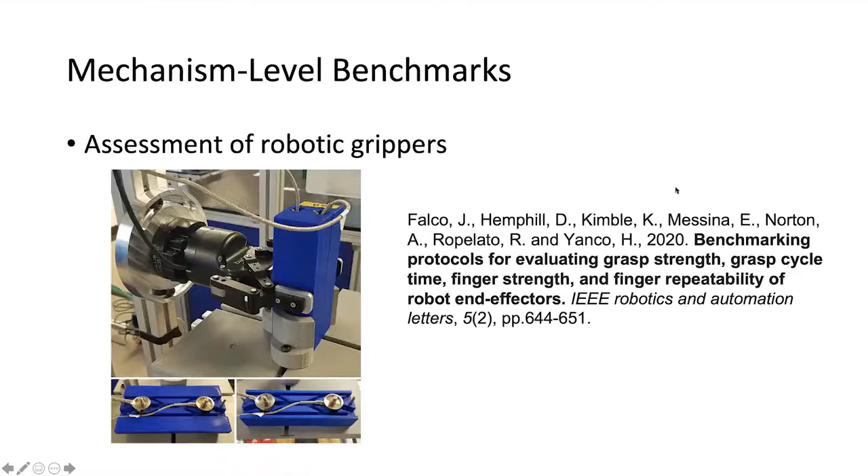Another one is algorithm level. This is mostly about measuring the performance of an algorithm. One example is measuring the performance of a grasp planning algorithm.

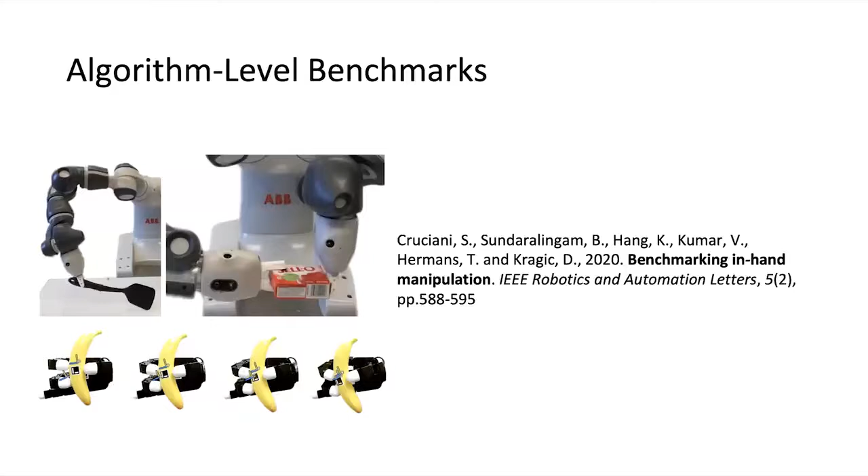In this particular example, the authors define some objects and some poses within those objects, and define experimental procedures targeted to assess the performance of the grasping algorithms. Another example here is benchmarking in-hand manipulation performance, again with very well-defined assessment strategies and experimental procedures. When we see the third category, this is the system level benchmark.

This is basically making the systems execute a certain task, usually as an end-to-end performance evaluation. For example, the Amazon Picking Challenge inspired benchmark defines poses of objects within a shelf along with some experimental procedure details.

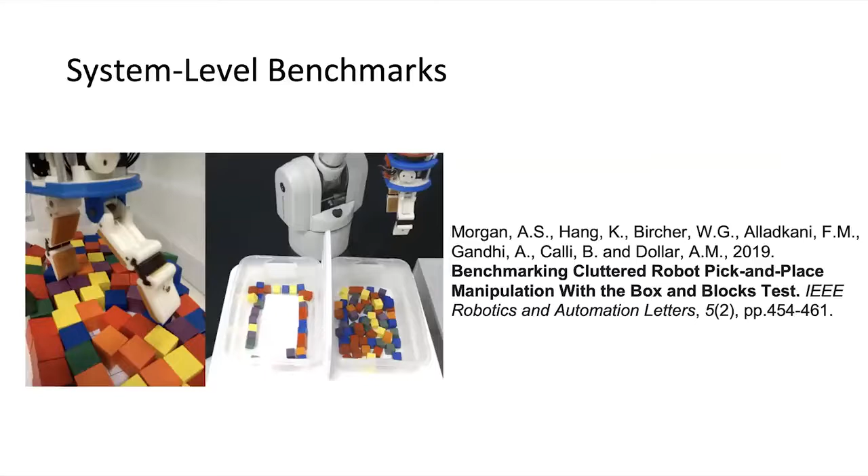Another one is the box and blocks test, published in this SI. The Amazon Picking Challenge 1 was not published in the SI, but this one was, in which users are expected to transfer wooden blocks from one container to another.

There are various target domains here that can be robotic grasping, bimanual manipulation, even aerial manipulation. There are a variety of applications.

There are some platform related issues when we use benchmarks in our own environment, in our own labs, because people use different strategies and different hardware when assessing a particular algorithm. I want to discuss those more in another presentation in this workshop, but one good solution is cloud-based benchmarks, which has been presented in this workshop on several occasions.

When we look at this whole picture, in competitions we usually have assessments with a judge. Each of these—competitions, benchmarking protocols, and cloud-based benchmarking—have different properties and different outcomes. Competitions are assessed with a judge, benchmarking protocols are usually self-assessed, and cloud-based ones can be judged or automated, oftentimes automated assessment.

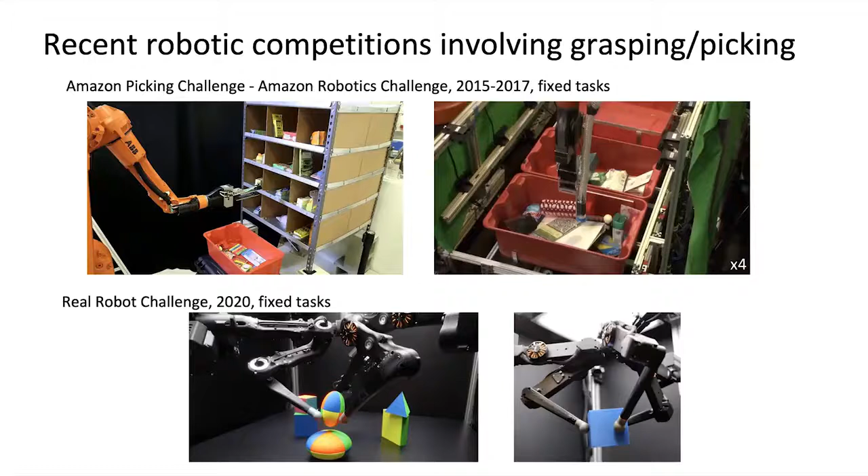Some of the competitions require manipulation, not purely a grasping action or just pick and place tasks, but also changing the object pose during motion or placing it in a special configuration. You see here two of them: one is the Open Cloud Robot Organization Challenge, which we'll have explained later today, focused on reorganization environments on a tabletop scenario.

One other type of competition was the Cybathlon arm prosthesis race, which is not exactly robotics, but many of the methods in robot hands are shared with the design of prosthesis. There are some fixed tasks as well, like picking keys from one place and putting them on a hook, or on the right side, a person hammering a nail.

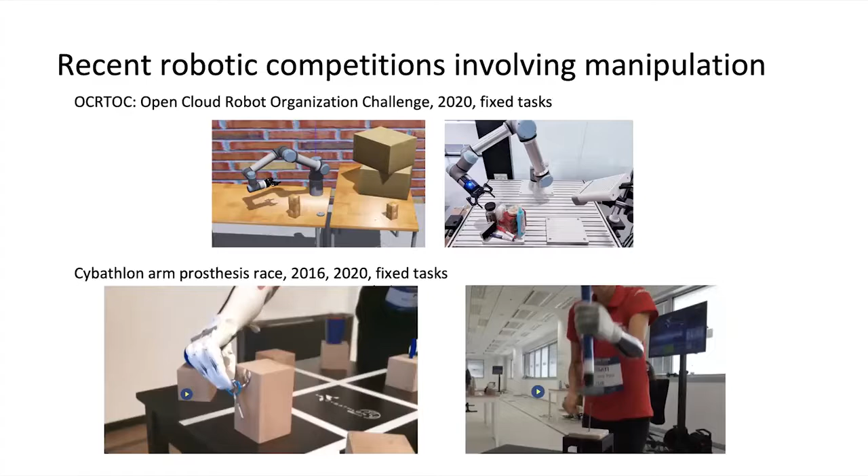Of course, this is an amputee, so they come up with some creative ways to solve the tasks, as you can see in the picture. So this is not an error. Actually, this is exactly how the person was hammering the nail.

Some other competitions involve assembly, which is an additional stage of complexity, because you not only have to detect the part and pick and place it in a certain configuration, but also consider the order to do those tasks. We saw on the World Robot Challenge, for instance, an assembly of this pulley mechanism. In the Robotic Grasping and Manipulation Challenge, we've had an industrial track from the beginning, and NIST has supported the competition by providing for all events one assembly board focused on a different set of tasks. In this case, you see on the bottom right a board with an assembly of a small pulley mechanism and some cable routing and connectors on the board.

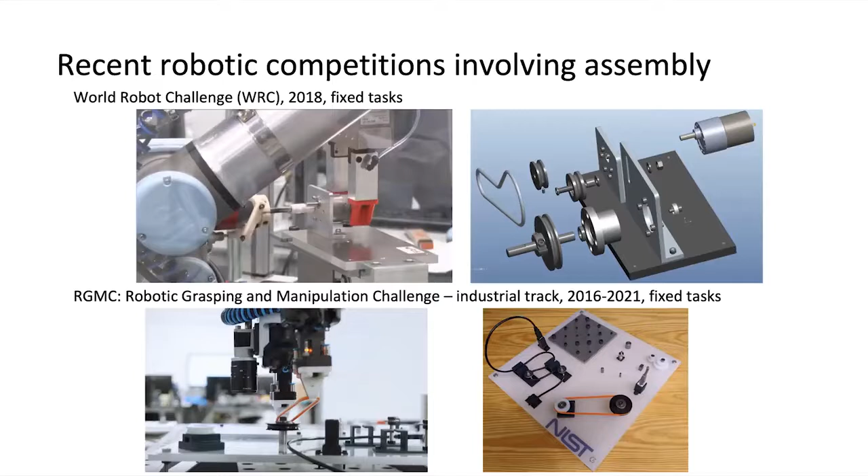Finally, we see some competitions involving mobile manipulation, which is very related to our problems. The most visible one is the ERL, the European Robot League. They have a subset of competitions called the Smart City Robotic Challenge, where they have a mobile platform doing some shelving tasks, in this case on the TIAGo platform. The same robot was used in the IROS mobile manipulation hackathon, which took place in 2018 and will take place again in 2021.

This competition is one of these events that has free tasks, so all the teams can decide what task they want to do using the same basic hardware platform. The advantage is that it simplifies the competition a lot, in the sense that there is a company supporting the hardware and providing on-site technical support. Teams can completely forget about transporting equipment, with all the costs and logistics that implies. However, the comparability of multiple solutions is really hard. It's more for displaying the state of the art in a particular field.

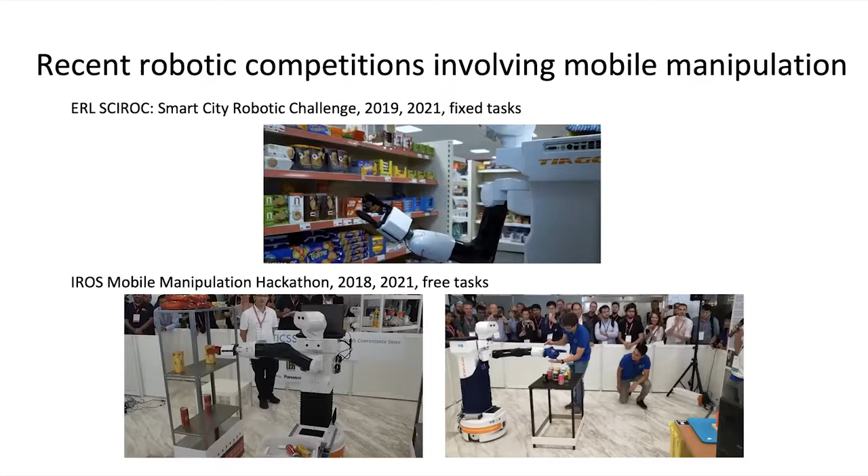So with this overview, we can move on, and Joe will introduce us to some additional examples on the assembly tasks and task boards.

Sure. Hello, everyone. I'm Joe Falco from National Institute of Standards and Technology, also known as NIST. We've developed a series of assembly task boards to support the manufacturing research community in robotics. We see that assembly is a critical operation for most manufacturers, yet it is underserved by automation such as robotics.

In the research community, we see there's been a lot of focus in past years on service robots, and so we're trying to get people interested in manufacturing problems, which still exist and are pretty complicated, especially with the onset of small and medium-sized manufacturing environments. Just to let you know, over 90% of manufacturers in the US are small and medium-sized manufacturers. They have their own issues when trying to implement robotics, but there's the opportunity for lots of solutions in those environments.

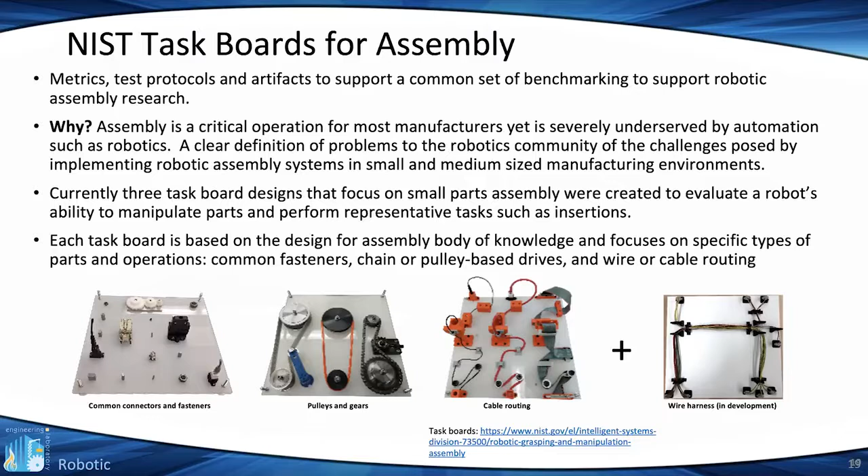So we currently have 3 task board designs that focus on small parts assembly. These include a common connectors and fasteners board, which is our first one. I think you saw it earlier in Adam Norton's presentation. We also have a pulleys and gears task board, a cable routing task board with deformable objects on both of those, and currently we're introducing a wire harnessing task board. More information on these task boards can be found in the link at the bottom of this slide. Next slide, please.

So the competition design - what we did was introduce these task boards to this Robotic Grasping and Manipulation competition that you started, which evolved into a manufacturing track along with the service track. These competition task boards draw from the primary NIST task boards I talked about on the first slide, so we pull in objects from each of those competition boards to construct a single competition board.

What we do is we award partial points per operation based on how well each task is completed. Sometimes someone might not thread a bolt fully, things of that sort. We limit competition time and we apply a bonus to any remaining time.

This is used to encourage autonomous operation. We don't want to see a lot of teach programming, which we do sometimes, but as this competition has evolved, we see that solutions are evolving and paying more attention to what's more important to small and medium-sized manufacturers. So it's a learning curve. We're teaching the robotics research community what the problems are for small and medium-sized manufacturers.

We also encourage the use of perception, both machine vision and force sensing, and we encourage the use of CAD data, which is something that's not typically available in the service robotics community, but is usually always available in a manufacturing environment.

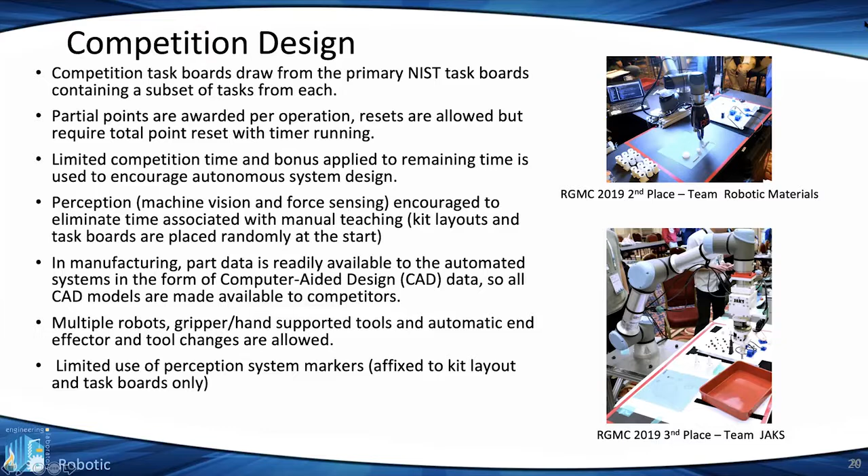So this gives you an idea of where we are with the task boards. We started in 2016 when we met up with you, and we helped introduce a couple of manufacturing type tasks into the service robotics track. The following year, we introduced our primary NIST task board 1 into the challenge, along with the World Robot Summit folks who were preparing for the 2018 challenge, and they came in with a subassembly for gears.

So there were two tasks within the manufacturing track of the competition. The following year in 2018, WRS held their competition. We did not hold the IROS competition. They would have been around the same time. Then in 2019, we introduced another task board to the competition, which was a conglomeration of all the different tasks that were on the NIST primary task boards.

We used pretty much the same task board in 2020, which was remote. The remote challenge had some good aspects to it, in that the competitors got to work in their own environments with the same lighting. Some of the systems are quite complex, so that made it a bit easier. And in 2021, we plan to hold another competition at IROS. The venue will also be remote.

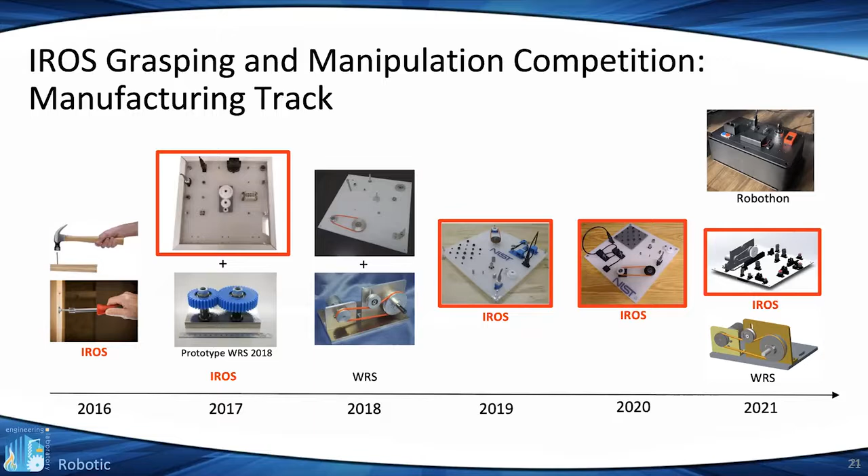Additionally, some other competitions being held are Robothon and World Robot Summit 2020, in 2021 because of COVID. I think it's being held, I'm not sure yet. I should also mention that WRS World Robot Summit also used the same task board concept. So they have a main assembly, but they also break it into a task board, similar to the way NIST does its task boards. Next slide, please.

So what are the solution outcomes to date? Teams vary from year to year, which is unfortunate because there's a lot of lessons to be learned, but some teams do come back and compete in consecutive years. The venue-based competition in the past has presented some performance issues. You're plugging your system into venue power and dealing with venue lighting, and that has been an issue in the past.

So teams competing in consecutive years, I see no indication of better performance. This is probably due to the fact that tasks change from year to year. Teams typically try to upgrade their systems. What I really have liked seeing over the past years is that teams are starting to implement CAD models into their solutions. And those sometimes present problems too. It's a new environment to them.

And a one-shot test may not be the best performance indicator. Ideally, these task boards would be brought back to your laboratory to do benchmarking with multiple runs. That's our intention - we use the competition to essentially promote the use of these task boards for benchmarking back at your home space. And then to the right, you'll see a couple of images from some of the better performing teams.

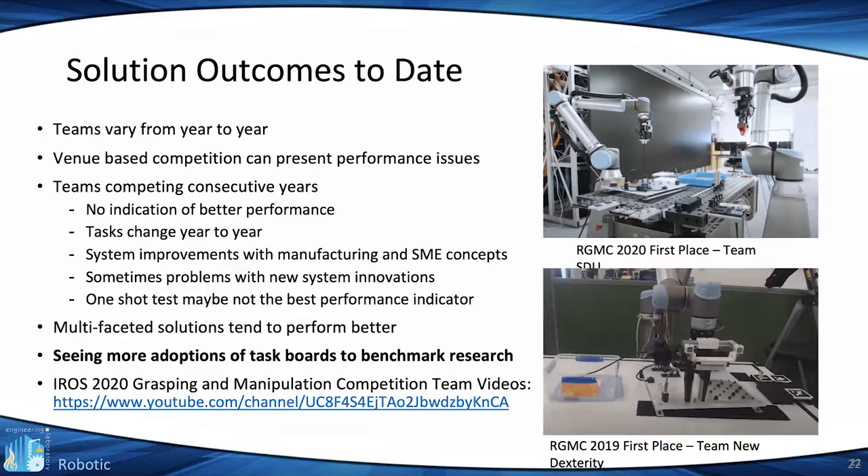So I think one of the indicators for solutions, and how to scope out the benchmark and how well the solution did, would be to also measure the cost of the system, which is not so easy to do. But I think in comparison to other systems, it's important to at least document that into the benchmark. In any case, you can take a look at the results of the 2020 competition - there are videos there for both the service and manufacturing track. Okay, I think there's one more slide and I'm done.

So this just kind of describes what this year's competition is. It consists of a wire harness as we're designing into our number 4 NIST task board. So on this task board for the competition, you'll build a small wiring harness, as well as a small mechanical assembly, which is a drive mechanism. And when you remove your wire harness from the construction area and plug it into the mechanism connections, you should be able to move your mechanism back and forth as an ultimate goal for success.

More details can be found - they're developing details as we're designing the solution now on the website. I think that's it, there's one final slide that points to it.

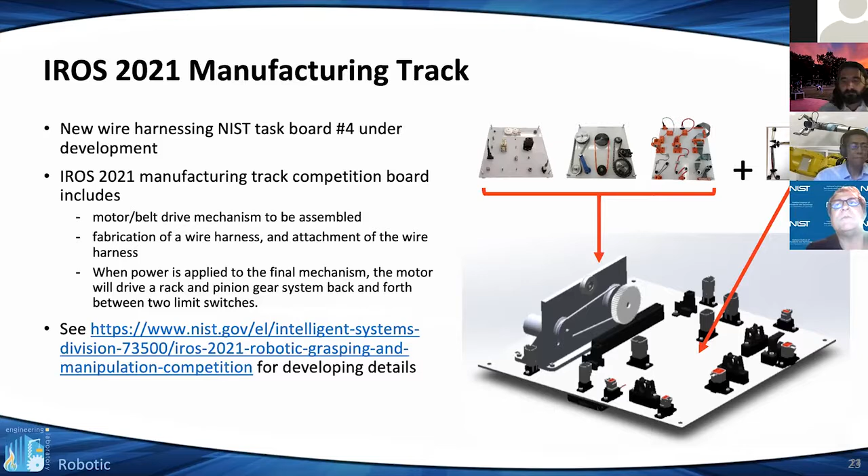I'd like to recognize Kenny Kimble. He does all our task board design and works closely with me on this. We have a publication on the assembly task board, and there's also a link to our benchmarks for characterizing robotic end effectors, which is kind of geared towards robotic hands too. So I encourage you to look at that too. Thank you very much.

All right, thank you, Joe.

So next, I'm going to introduce the service track in the recent robotics grasping and manipulation challenges. So the challenge has been run for 4 years, 4 times in the last 5 years. And as Joe mentioned, we skipped 2018. And among the years, we had combined about 20 unique tasks.

Over the years, we see a lot of improvement in performance in the service track, but at the same time, we gradually increase the difficulty of the tasks. From the very beginning, we had hand-in-hand, which has absolutely no perception, using human perception. And even for the automation side, it was limited perception. In the current years, we actually have everything randomly placed and even ask people to move them around to make sure they are random.

At the very beginning, we basically allowed the teams to try multiple times, and if it works one time, we recorded the best score of that try. Now we basically say you have to do this 5 times, and we take the average.